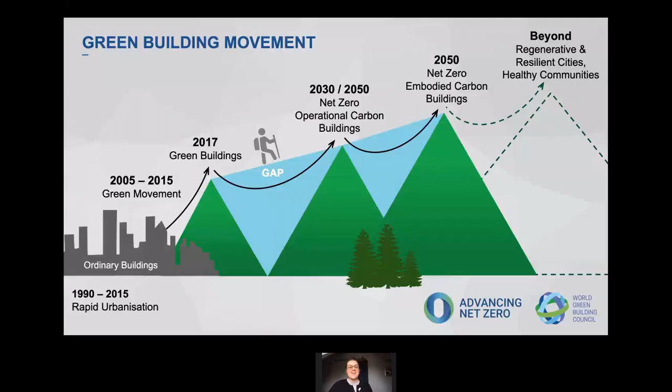That's why the Advancing Net Zero programme from the World Green Building Council exists. It's a global campaign to accelerate the uptake of net zero carbon buildings to 100% by 2050. We are increasing awareness and education of the urgency and achievability of net zero carbon buildings. We seek to achieve alignment and commonality across different Green Building Council approaches and certification schemes, and to expedite uptake in global markets by sharing market leadership examples at forums such as the one you're having here today.

As we've heard, and no doubt you're familiar with these numbers, our sector is responsible for around 38%, by recent numbers, of energy related emissions. 28% of that is from building operations, coming from both the residential and commercial sector, and direct and indirect emissions, meaning we have a challenge with buildings that already exist relying on gas or on-site combustion from diesel engines or oil, different fuel sources directly from the building, and also our reliance on indirect emissions through the grid.

We also have a responsibility for around 10 or 11% of emissions that come from embodied carbon, from the emissions that go into the production and construction processes through materials and the creation of projects themselves, but also over their lifetime, the maintenance of buildings and renovation and things like that.

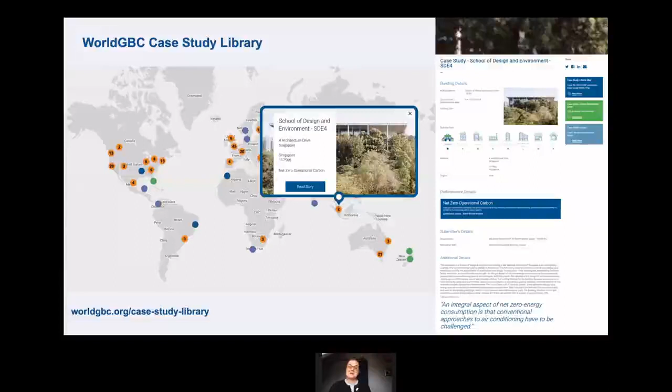But we need to be moving faster, and the Net Zero Carbon Buildings Commitment is an initiative from the World Green Building Council that currently has 132 signatories across businesses, cities, states and regions committed to going further and faster to achieve the targets set out in the vision statement across their own portfolios sooner. For cities, states and regions, this means actually implementing regulation to achieve our vision, because we need to be taking action at scale.

We've proven it's possible, and now it's time to ramp up those solutions. You can find lots more about this on our website.

So finally, our theory of change is that through radical collaboration across all disciplines throughout our sector, towards a common vision, both at an asset level and industry-wide: can you guarantee or justify why a project you're working on is choosing not to be net zero in this current climate emergency? Through enhanced communication, raising awareness, building industry capacity, and improving education by addressing foundational gaps in skills, data and benchmarks.

We also need to address our existing buildings, ensuring opportunities for retrofit are understood and capitalized on. This means creating new and innovative business models, new technologies and circular patterns that help drive us towards a net zero economy, and ultimately mandating reductions in both operational and embodied carbon aligned with a 1.5 degree compliant decarbonisation pathway via regulation.

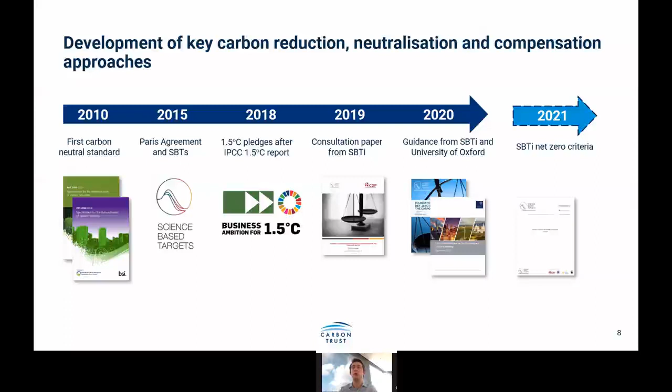One thing we've all seen across various news sources is that there have been many companies and countries increasing in their communication of carbon neutrality and net zero commitments over the last few years.

So we'll now take a deep dive into what carbon neutrality and a net zero roadmap looks like for business today. Five minutes, Tim. Okay, thank you, Julian.

Some background on how businesses have been developing their climate goals, but also a few definitions to put into place. Carbon neutrality is basically when the carbon footprint of an entity has been reduced and any outstanding emissions are offset with high quality offsets. So the key point is that carbon neutrality is something that is achievable today, but that is a more short-term ambition.

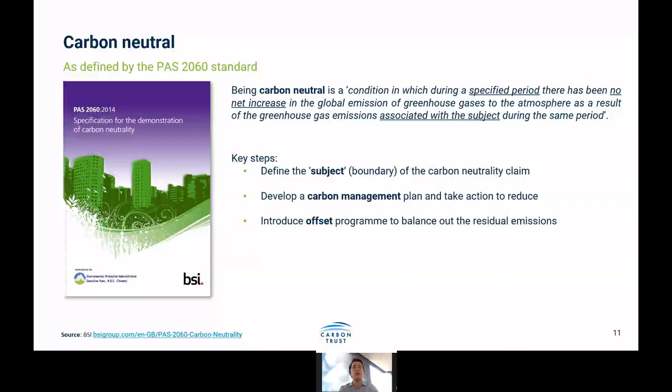If we move forward to the net zero topic, the science of net zero is quite simple. It basically means that every sector in every country needs to be on average zero emissions. And that's something we have a good understanding of across electricity, cars, buildings, and even a lot of heavy industry, as we're talking about on the conference here with the built environment. But in certain areas like air travel and agriculture, there is currently no prospect of getting to net zero in the near future without some radical changes in production or in our day-to-day lives.

So for these residual emissions, greenhouse gases will then need to be taken out of the atmosphere at the same rate as they're added, so that on average there are net zero emissions.

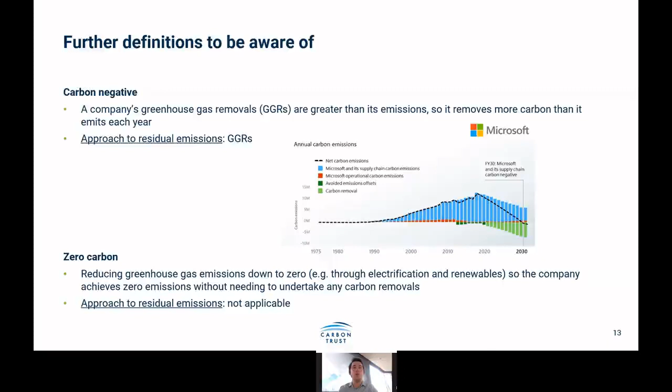A few further definitions to be aware of that have been mentioned as well. Carbon negative is basically when the greenhouse gas removals are greater than a company's emissions, so that it removes more carbon than it emits each year. One example is from Microsoft, who've set a pathway to being carbon negative by 2030. And then there's also zero carbon, which basically means that a company achieves zero emissions without needing to undertake any carbon removals. So just a quick overview of the difference.

So some of the reductions that are necessary in carbon neutrality are not actually specified, but for the net zero ambition, it's to be aligned to a 1.5 degree science-based trajectory. And I'll go forward onto some of the steps that can be taken as well.

So how can these definitions be translated into practical actions? Firstly, it would be to calculate a baseline footprint.

Basically, if a company wants to set a science-based target or be net zero, they would have to calculate a scope 1, 2, and 3 baseline. And to give a little bit of context about where this comes from, the scope 1, 2, and 3 emissions are as defined in the Greenhouse Gas Protocol.

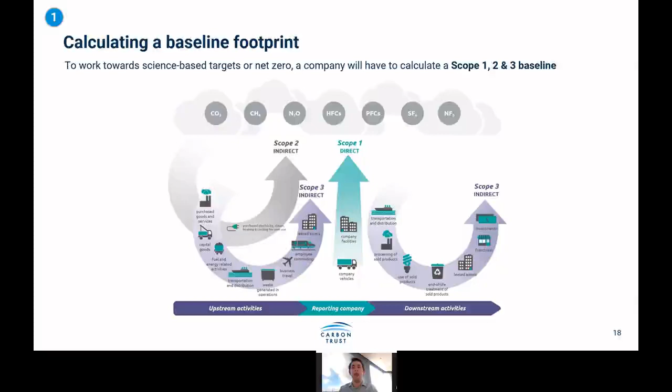So once this has been calculated, a company can then set a science-based target, and it would look at basically what's your current baseline, and then how you would have to decarbonize year on year in order to achieve a net zero goal by whichever year, depending on your sector and the size of company.

So just to touch on the different emissions and some of the different strategies that can be implemented. Across purchased electricity, looking at energy efficiency on site, and then moving to renewable energies. In transportation, moving to electric fleet, for instance. These are more easy, straightforward to manage and measure, but looking forward into the scope 3 emissions, that is a bit harder to decarbonize.

Looking into that, some of the top things that companies have a good awareness of is how much they're purchasing in their goods and services. So a solution could be to implement a better product design. We talked about circular economy models earlier as well. And then also with regards to business travel, that tends to be quite a large source of emissions for service-based companies.

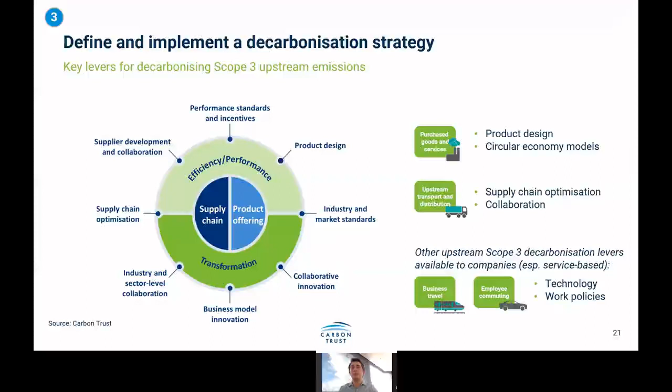Apologies. Yeah, so I'll just skip forward to the end.

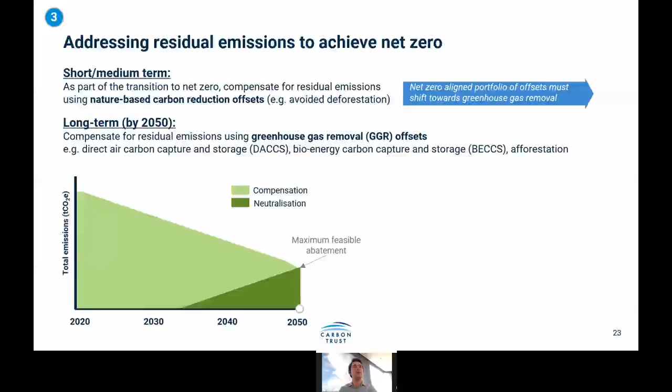So basically the journey to net zero: measure baseline footprint, align your science-based targets to a 1.5 degree pathway, then define and implement your decarbonization strategy, and then be clear and transparent with your communication—knowing what's included and what definition you're working towards—in order to avoid any form of greenwashing. That's all, apologies for going over time, and thank you for your attention.

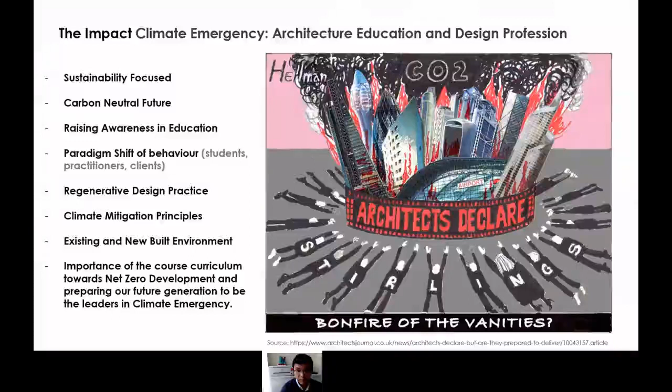Climate mitigation principles need to be adopted in existing and new built environments—we have to think about existing buildings and new buildings to make sure they are also carbon neutral. Most important is the role of course curriculum towards net zero development and preparing our future generation to be leaders in the climate emergency.

My observation or interpretation of rethinking the contents and role of academia is that it has to integrate environmental design within the curriculum. That should include more qualitative and quantitative aspects. Some technical modules should be included if there isn't any scientific, ecological, and multidisciplinary module integration—that's very important—and criteria should be designed such a way, for example RIBA criteria, to focus on net zero future as well.

This could be integrated at various levels—foundation course, undergraduate, and postgraduate—and I'm talking not only about the UK but across the world. For example, at undergraduate level, study should be more sustainability focused, with design studios and technical modules to support that. But at postgraduate level, probably more advanced technologies like life cycle analysis or zero plus energy buildings, etc., should be integrated.

Other content should be integrated with field evidence and reliability of digital simulation tools. You all probably know that RIBA design awards need integration of field evidence and field data, one year to be eligible for an award. So that's also important to include in the curriculum from the very beginning.

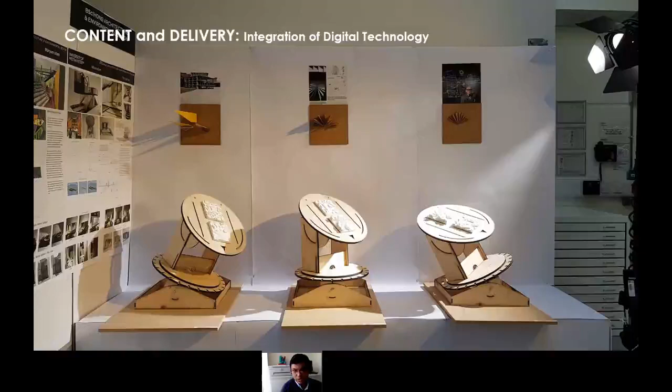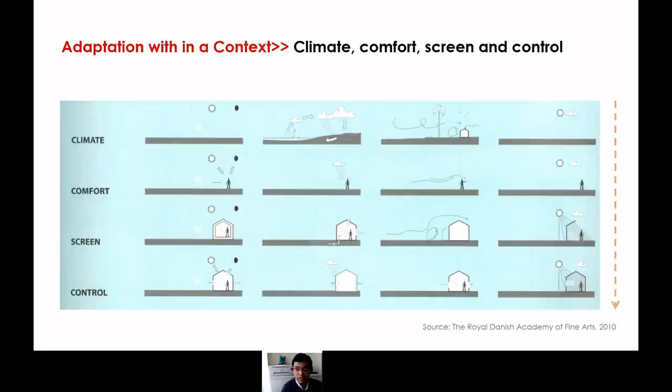It's also important to adapt to context, and we teach students how to cope with extreme climate scenarios in the future and how building skin should be developed differently in different climatic contexts - we should always do that. For example, one thing we do is learn from the past, learn about the clothing of a certain climate and how it has similarities with the building climate screen. Clothing insulation and building insulation are kind of similar in making people comfortable, and this awareness is usually developed through that.

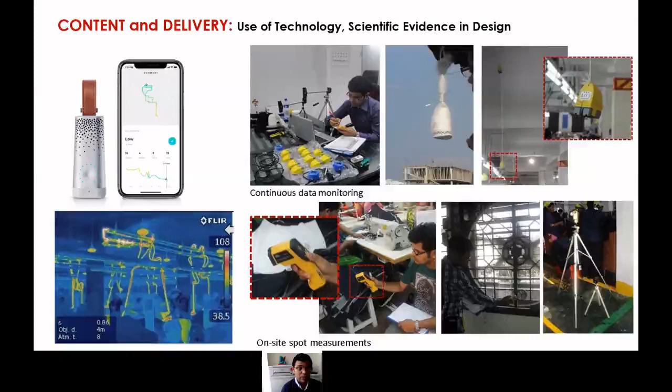But you also cannot always do physical modeling, so we have to build on reliable simulation tools that we can rely on - this is also part of the process. One example I want to show before I finish is a collaborative research and learning experience, where students were involved in research using IoT and real-time data visualization, so students understand how changing an opening window changes comfort levels and how real-time temperature experience affects the human body.

This kind of integrated approach to research and learning experience, students should have it so they are more aware of this from the very beginning. These are two examples I'm involved in at Sheffield Hallam University, in environmental technology modules where students get involved: first year they learn basic calculations, second year they understand modeling and simulation tools, and third year they apply simulation tools to a greater extent to achieve more environmental performance. Of course, Design Studio is also designed that way, to design off-grid systems.

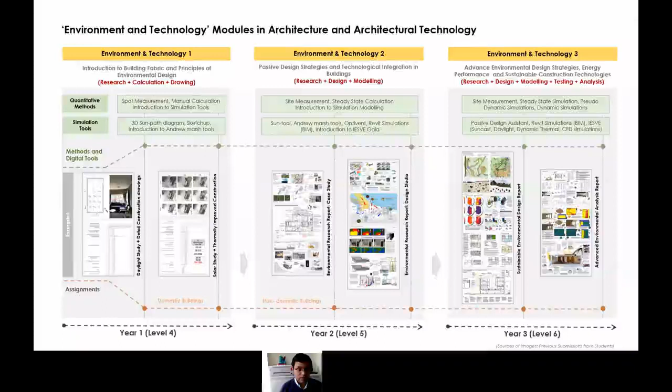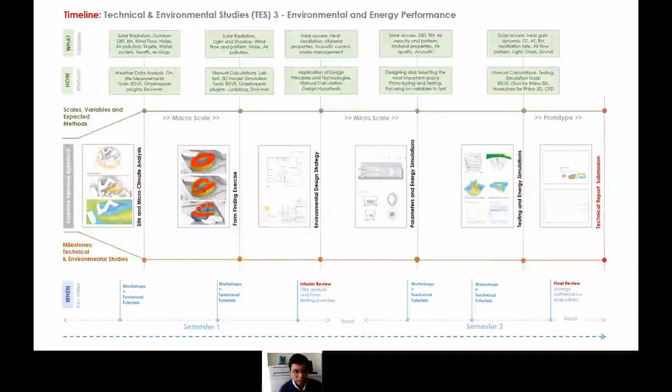Thank you, Motaz, for that perspective from academia and how academia is leading the fight towards net zero. Next up we have Dr. Andy Ford, also an academic, representing London South Bank University, where he's Professor of Building Systems Engineering. He'll be speaking on the work done so far by the UK, CIBSE, and other bodies on the climate emergency and net zero projects. I can see he's got his presentation ready.

Yeah, okay, I'll be with you in just a second. Hello. Okay, no, take your time. Not too much time. It's not too much time, thank you. Okay. Right, are we on yet? Okay, so... it's still on. Oh, there we go. There's full screen. Got there? Yeah, yeah. Is it a full show yet? I can't see it. Yeah.

All right, okay. Well, hello everybody, and thank you for inviting me to come and talk. I'm going to spend a little bit of time now talking about what's going on in the UK, and eventually from the university's perspective.

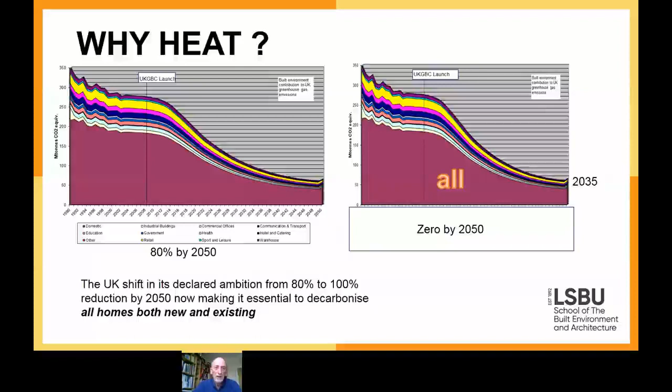But that big purple bit, that's our existing homes. There are 29 million homes in the UK, and 85% of those are heated by natural gas, and that's going to have to end really soon. That's a challenge for everybody in our entire industry.

Part of where we need our building services and knowledge about decarbonisation is into local authorities and governmental organisations, so that engineering knowledge is at the top all the way through, pushing for the right thing to happen. We've had many local authorities declare climate emergencies, and they're now desperately looking around because they're short of technical knowledge on how to do it.

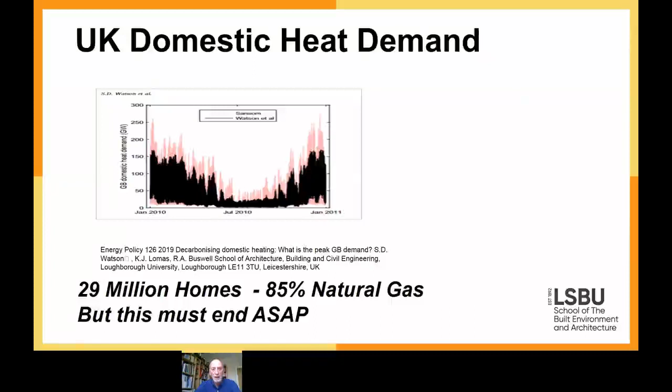Finally, what we're doing currently is debating and informing. We're running something called the Climate Emergency Debate Series. We've had several on heat, starting with one on decarbonising the domestic stock, and the next one is 'How on Earth', on Thursday the 22nd of April, Earth Day, where we'll talk about the Wellbeing of Future Generations Act—an amazing law which the Welsh government introduced that is affecting everybody's way of thinking in Wales. And that's it.

Thank you very much.

Thank you very much, Andy, and thanks for wrapping up so promptly. Great presentation. We're finished with the presentations for the morning session, as it were.

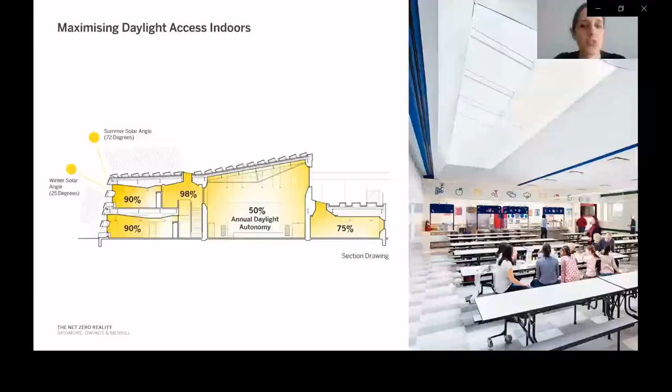Another key component of the school's design that renders this building so high-performing is one of its most visually distinctive features: a highly insulated exterior rain screen with 9-meter-tall precast concrete panels that anchor the facade at the top and bottom only, eliminating the need to puncture the air and vapor barrier along the building's height. With this approach, the building not only reduces its energy demand, but also minimizes maintenance requirements and maximizes indoor comfort throughout the year.

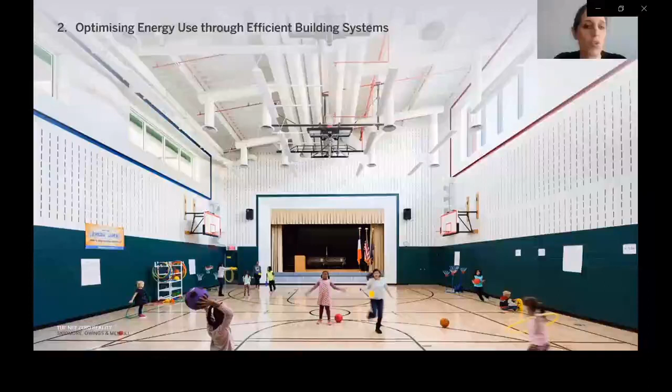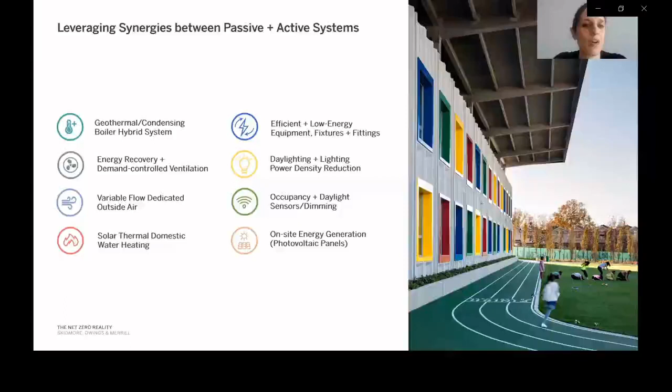In addition to maximizing passive design strategies, the Kathleen Grimm School also leverages active strategies and efficient building systems to optimize its performance while enhancing user comfort, health, and overall well-being. Some of the key active strategies deployed throughout the project include a hybrid geothermal system that helps naturally heat and cool the building, demand-controlled ventilation that saves energy without compromising indoor comfort, solar thermal that provides domestic hot water heating, very low energy equipment and lighting, and occupancy sensors that prevent energy wastage in unoccupied spaces.

All of these strategies enable the building to achieve more than 50% energy savings compared to typical public schools in New York City. This cutting-edge building's net zero ambition also defines its unique architectural identity. An energy-generating canopy of more than 2,000 photovoltaic panels wraps the building and harvests as much energy each year as the building consumes.

Working with the Center for Architecture, Science, and Ecology, a research laboratory formed in partnership between SOM and the Rensselaer Polytechnic Institute, the design team was able to maximize the building's energy generation potential on site by carefully placing the PV panels at different angles and in various configurations, which optimized their performance. As a result, the school's energy generation increased by 35%, leading to the development of its distinctive roof structure.

Throughout all of these strategies and more, the team was able to significantly reduce the school's overall energy use. Nonetheless, there was still an opportunity to go even further, especially knowing that almost half of the building's energy demand would very much be dictated by the way occupants use the space that the team was designing.

Influencing occupant behavior, therefore, was a critical part of the overall design and now operation of the Kathleen Grimm School at Sandy Ground. To ensure alignment to the project's net zero goal, and to secure consistency throughout the process, the design team partnered with the building's occupants on day one. In this rather unusual scenario, through a visionary yet pragmatic approach, the wider project team, including all key stakeholders, worked collectively to lay the groundwork for a net zero reality.

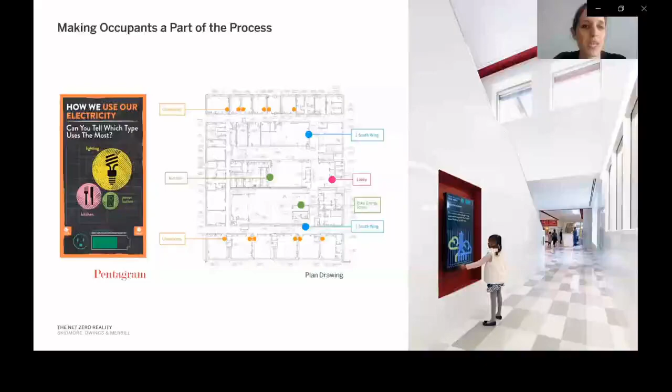This culture of shared accountability established at the design stage of the project continues to be at the forefront when it comes to the building's use, operation, and management. A continuous monitoring and optimization system, embedded with a 3-year commissioning period and consistent post-occupancy evaluations, guarantees the building's ongoing net zero performance.

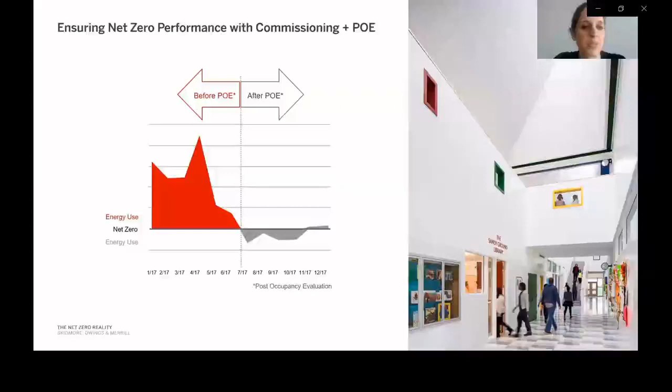A reputation for walking the walk, incorporating net zero performance criteria in the building's specifications and procurement process, as well as engaging the project team post-completion, have inspired confidence in the school authority that this building was establishing a new precedent for how future school buildings would be designed, built, and operated.

The Kathleen Grimm School points the way to the future, where research-based creative design, a collaborative approach from day one, and commitment to long-term responsibility offer an opportunity to seamlessly harmonize the physical, man-made, and natural environment of our planet, rendering us, as built environment professionals, the standard bearers in the fight for the future of our well-being.

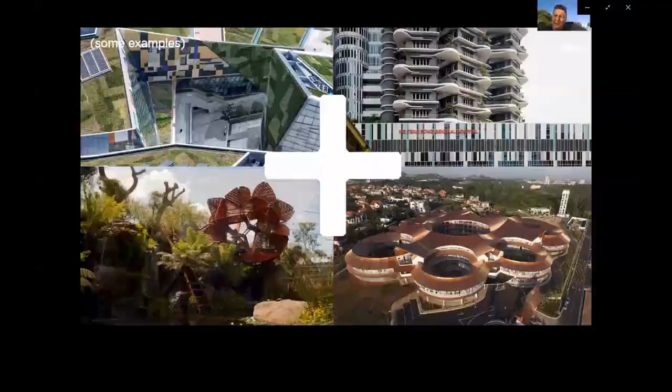Some examples of our work from around the world, China, Singapore, Malaysia, include hospitals, schools, community and cultural centres. There's great interest across all of these projects in the purpose and outcome of the work, the creation of place, the inspiration, the joy we find in the built environment, our workplaces, our homes, and also the lyrical and the imaginative. How do we inspire people to look at the world with fresh eyes?

From large breweries targeting net zero through to offices targeting Green Star and Platinum LEED, Platinum WELL projects, new sustainable communities, we're very interested in underpinning the built environment on an example of ecological sustainability.

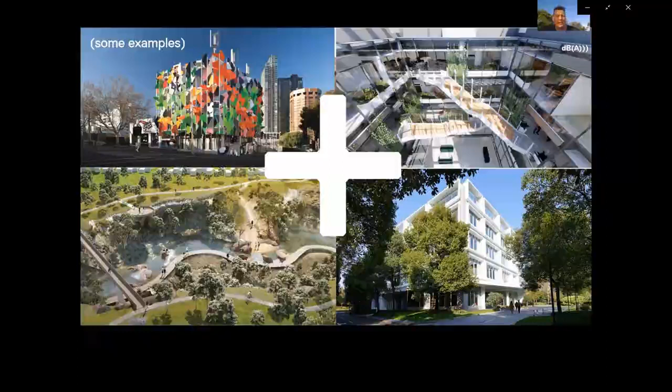The Pixel building is a project I'm about to talk about. I'm going to follow that into the Shanghai Construction Group SCG 0+, and finish off talking about a project quite dear to our heart, a future project. Sustainability for us.

Everything can be more or less sustainable, but for us, rating tools are to sustainability as religions are to spirituality. There's an underlying truth and medium to which these various tools, structures and scriptures give us some common ground, and that common ground is key to making any changes to the world.

Rating tools can be a fantastic lens to performance. Ultimately, each of these tools should be destined to make itself redundant, but they are a great way for us to find the commonalities between projects and understandings.

Zero tools coming in now, zero water, zero waste, zero carbon, zero energy, are starting to align with the passive house tools. In the Venn diagram of all this, how do LEED and BREEAM give us different filters to look at the performance of our projects? China 3-star and all the regional tools from Malaysia through the Middle East to London to Singapore, all of these underpin what we see as a great push towards the United Nations Sustainable Development Goals.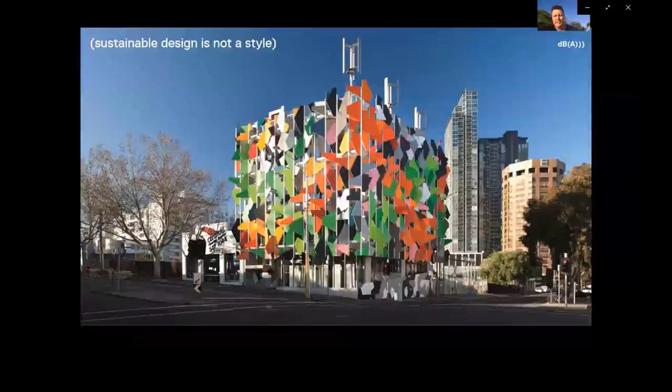And what we realized very quickly was that sustainability is not a style. If you design something to look sustainable, you've forever cast that performance into a stylistic argument, which we need to be very wary of. So our building is iconic, brave, quite bold in its colours and shapes.

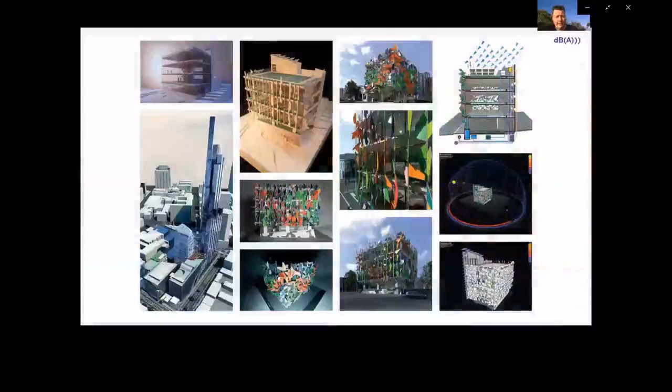It achieved a perfect score - every possible point in the Green Building Council Green Star rating tool. We got the highest score in BREEAM and LEED, well above the 75 points you need. We really demonstrated excellence across all aspects of the tool, from native grasses, xeriscape landscapes, to wind turbines - the lot. We had everything in here to demonstrate you could build a building in a transferable way, whether 60 storeys, 50 storeys, or 20 storeys. A lot of research, a lot of thinking, a lot of great minds took part in that project, and the sum of the parts is much more than all of these components.

To the credit of the project team, and actually living and working in the building now, some of these things don't work, and it's about understanding which things don't work and learning from that. When you're not finding something, not pushing that boundary, the line of testing to failure, then you really aren't learning anything. So we're able to take those lessons - being bold, being net zero, being brave - and ship them into new projects.

So in 2010, Pixel achieved 105 points from the US LEED rating system. It's the highest rated building in the world, yet certified anywhere - that's a lot of buildings. And sadly this remains the case 11 years later. So our team has been designing from this building to try and beat it, take it to the next level, and see what happens in 2022.

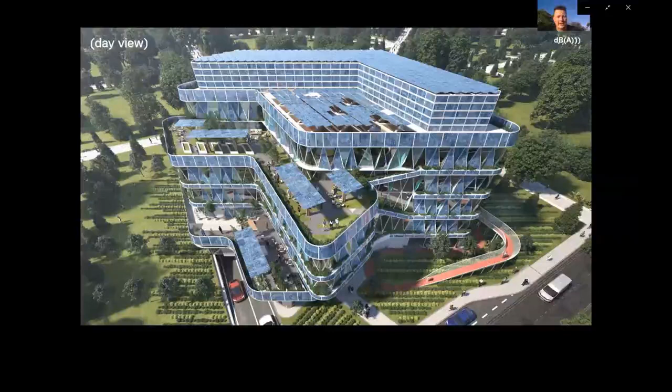Ultimately the project seeks to embody, achieve, and wrap a net around all of the 5 zeros, all of these rating tools, including Passive House, and produce a bit of a Rosetta Stone for rating tools - a thermometer on what we can do, what demonstration technologies we can embed, and how we can push architecture and buildings to change the rules by which we build buildings, all buildings in China from now on. That's how we get legacy changes in the projects we're doing.

So clearly for this particular project, the facade is our primary environmental organ, just like it is on our bodies. It's the interface, the membrane. It's where we harvest all of our energy. It's where we harvest our water. It's where we harvest our daylight from on the interior.

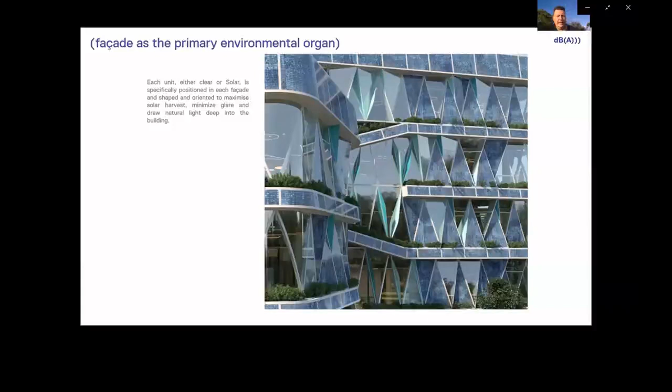We've developed some quite effective digital mock-ups that are now being tested and built in one-to-one scale in order to understand all of the components, minimizing glare and getting all of the systems right to define what the indoor dynamics are of the spaces.

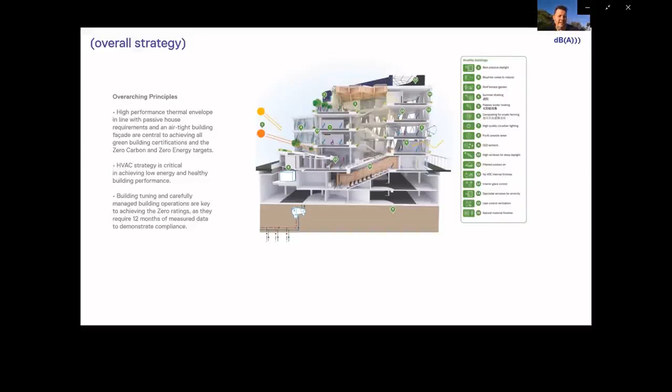This facade really envelops a Passive House project whose energy is all harvested from site. We're trying to get a very high efficiency, high performance building, reducing our energy use as much as possible, and tuning all of the tools to deliver the outcomes we're looking for, not only in net zero energy, but in net zero water.

Net zero water balance means that we're harvesting all of the water that we use inside the project on the site, including returning water through to the environment and the natural environment.

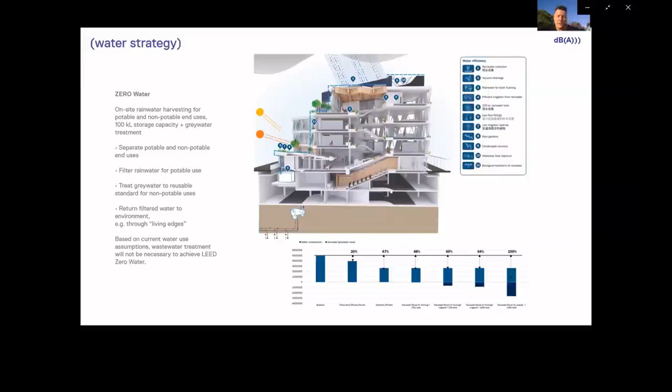Our energy strategy is really solar, solar, solar. We learned from Pixel that vertical turbines and micro turbines, whilst they have a visual demonstration, are extremely fickle given the low quality of the wind due to urban turbulence. We're only a 25, 30 metre high building, and turbines haven't delivered the outcomes we want, so we've really pushed a solar component here. We're looking at about a 62 kilowatt hours per metre squared energy budget for the office building.

So really, this building is like the olden day combine harvester, but it's a combined harvester where food, water, energy, light, everything we need is coming from this project.

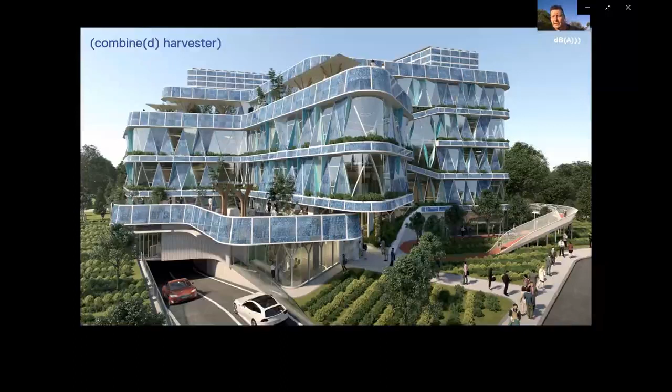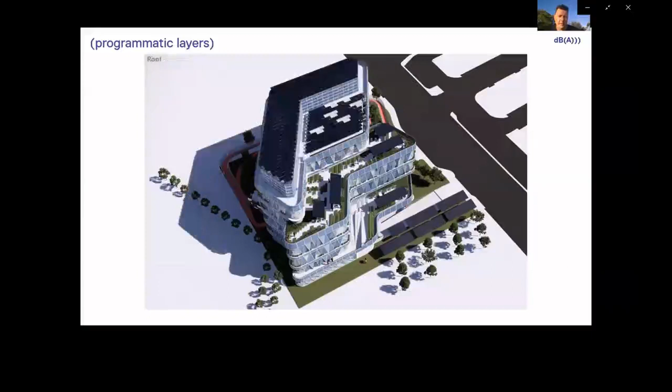You can see here the programmatic layers with ground floor: we've got a vegetarian kitchen producing lunches for all of the staff from food grown on site. Then a series of office levels, library levels and breakout levels for the building occupants on the way up, all the way to the roof with garden terraces and solar panel harvesting. The working heart of this project is this atrium space - it really is the main connector, the lungs and heart of the project.

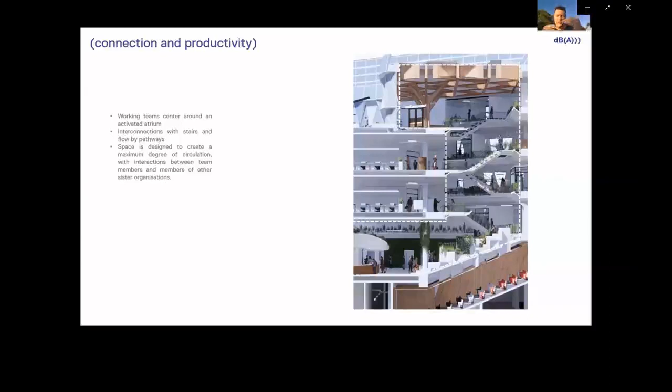Each office has 3 different tenants split over multi-levels, so we're driving people up and down stairs, getting them active, getting them circulating, and making them aware, in a work productivity sense, of what other people are doing in the space at the same time.

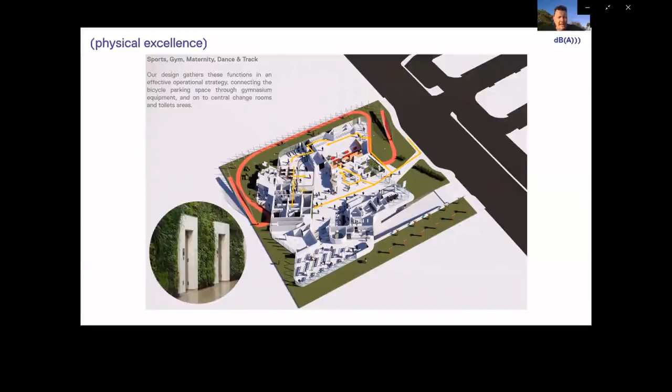As you can see, there's a radical biophilia layer run over the top of this - sports, physical excellence, lots of really interesting outcomes when you overlay all the tools together. We're talking running tracks, gymnasiums, dance halls, all sorts of productive environments we need to maintain to drive engagement into the physical reality of people. You can see the sports track running around the outside of the project here.

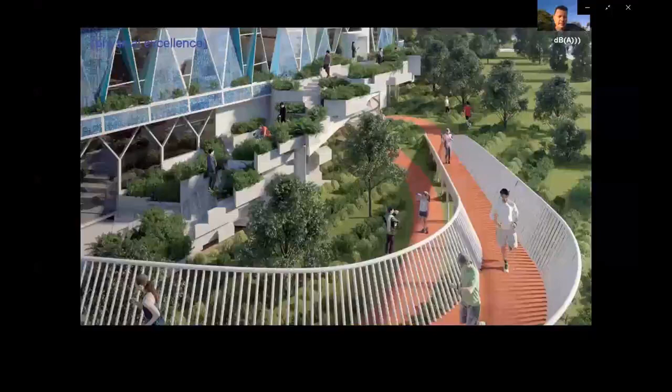I'm up to 13 minutes already, so clearly I need to get a bit of a kick on.

From biophilia and that biophilia integration, that project is our present cut at what we can do to be the most sustainable building in the world again.

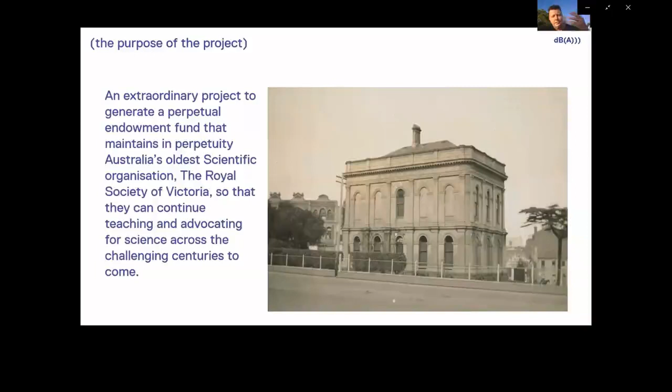If I've got just a bit of time to go to the future - 1 Victoria Street is a project for the Royal Society of Victoria to create a perpetual endowment fund to keep them teaching science to kids and politicians for centuries to come.

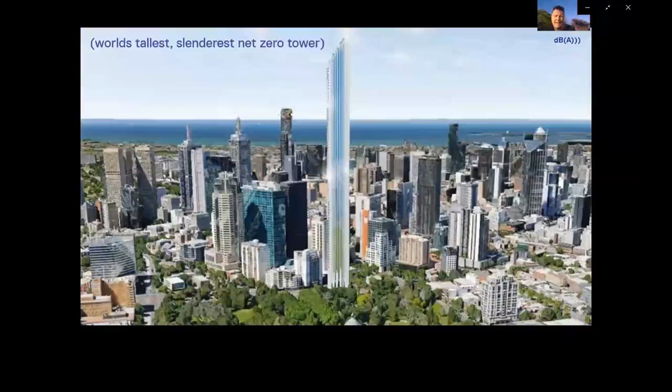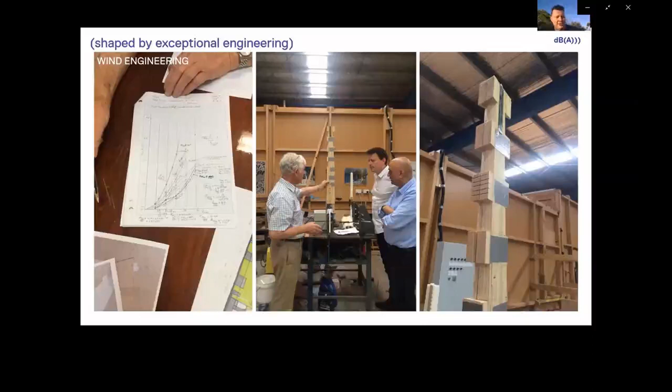We intend to create in this tower the tallest possible project we can make with all of these drivers in play. At 290 metres, it really is an icon for the city of Melbourne. It's net zero energy, net zero water, and it's driven by engineering - this is our wind engineering and structural team, Buro Happold and Mel Consult, testing and shaping and driving the sustainability.

It's driven by exceptional sustainability, set to become the world's tallest passive house - an innovative concrete tube with timber floors, net zero energy, net zero water, net zero waste, LEED Platinum, WELL Platinum, Green Star Platinum, and housing a UNESCO Global Centre for Excellence in the base of the tower.

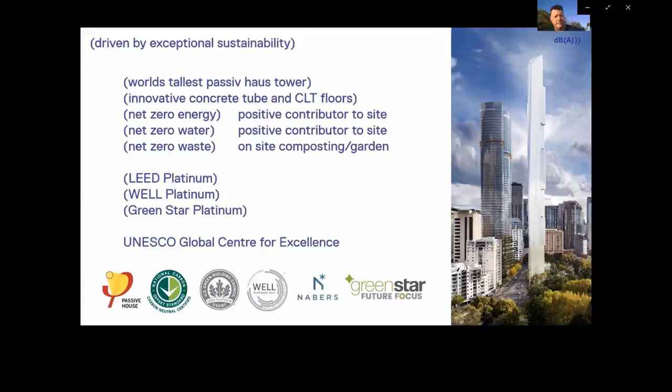The project for us is a translational tool where we're doing this project and open sourcing all of the technology and the deliverables that we put together, in order to make sure that this project can really transform lives, not only in Melbourne and Australia, but also around the world as a bit of an icon for the future and how we might possibly develop some of these projects.

So from past to present to future, what's really critical is that we understand that we're all living in a bubble. Everything we do, everything we are, everything we need is in this bubble, and it's where we all live. And we have to approach that world, this environment, this biosphere, ethically, ecologically, and exceptionally. That's what Decibel Architecture tries to do every day. Thank you.

Thank you, Mr. Dylan Brady, for an interesting insight on what's happening in Australia right now with interesting trends on the Pixel project. As rightly said, it's essentially creating a vision for sustainable architecture and for imaginative and innovative design. Amazing work in Australia.

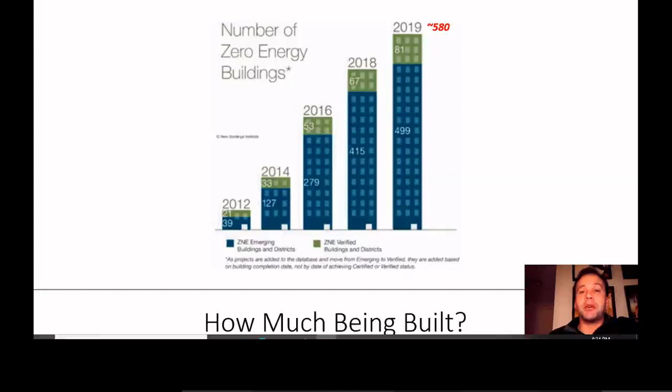We have already built almost 600 buildings as of 2019, and again this is a bit of a dated number. I'm encouraged to see that this is transcending political boundaries as well as climate zones. It seems to, in fact, be following our population density into our most populated and also most dense and growing areas, regardless of politics and climate, which is encouraging.

And we're starting to even see that the municipalities and states that did not exit the Paris Agreement are getting a leg up on the advantage. So we have codes and commitments as a big component of this.

One city, Boston, which is where my practice is located and I do a lot of my work in, is moving from a 17 to 18% renewable energy based utility grid to, by 2050, being 80 to 90% renewable based. This is also in conjunction with zero waste systems, zero transportation emission systems, and ultra efficient buildings, both new and existing. Dare I call it, it sounds a lot like the Green New Deal, right? This is what we in Boston and other similar cities are beginning to work towards, to electrify and decarbonize by 2050.

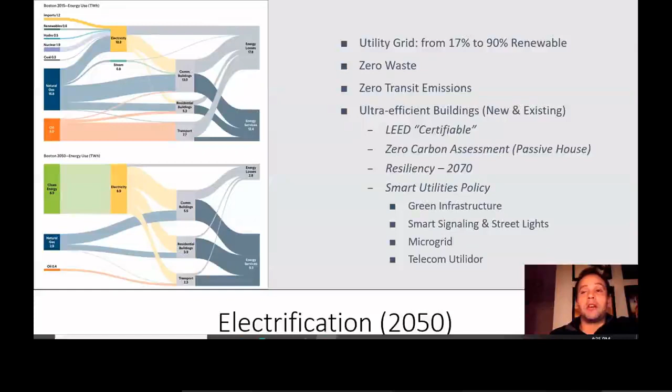We're starting to see falling costs, both for renewables as well as technologies, and this number continues to fall to the point where it is more cost effective now to focus on renewables than it is to utilities, even though utilities are giving us rebates.

So this is a look at rebates associated with passive house certification, upwards of $3,000 a unit in Massachusetts, as well as a pretty handsome net performance bonus, which if you go all electric could be pretty substantial in a heating-dominated climate like we have.

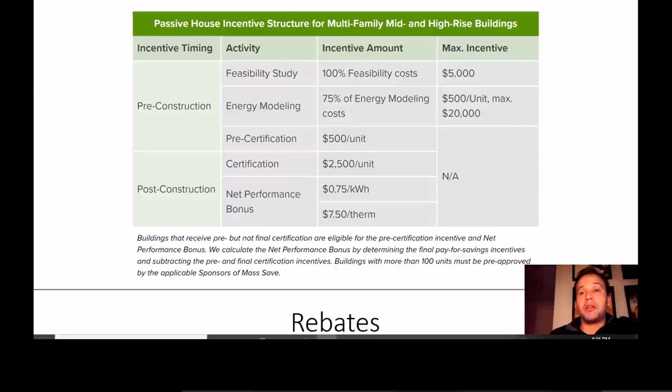We also are seeing third-party rating systems finally acknowledging the need to recognize buildings pursuing net zero. LEED, Passive House, and Living Building Challenge, and more are doing so.

We're seeing the technology becoming more approachable. Instead of the larger, clunkier, heavy dead load panels, we're starting to see more friendly technology for EVs, solar rooftops, and even solar driveways.

We are seeing AIA membership firms and others sharing lessons learned through meeting the AIA 2030 commitment, as well as winning the AIA COTE Top 10 award every year, and sharing that knowledge.

And for whom and why? Well, the future generation demands it. If they are to be successful, if they are to thrive, if they are to benefit from the world that we inherited from those thinking about us when we were the future generations, well, they're not just sitting back and waiting for us. They're actually demanding it. You can ask Greta about that. But they deserve it too.

So I want to talk a little bit about mission to market, mission to mass market. How do we move from mission-driven clients to mass market clients?

The Evolv1 project in Waterloo, Ontario is such a project. This is Canada's first zero carbon building. It's developer driven, and so needs to be highly flexible. It's on suburban previously developed land, and it came in at a typical market rate Class A budget. They did not want to price out the tenants they wanted to attract. It's 104,000 square feet on 3 floors, open office spaces that could be various different sizes, or you could have one tenant that comes in and takes up the whole building.

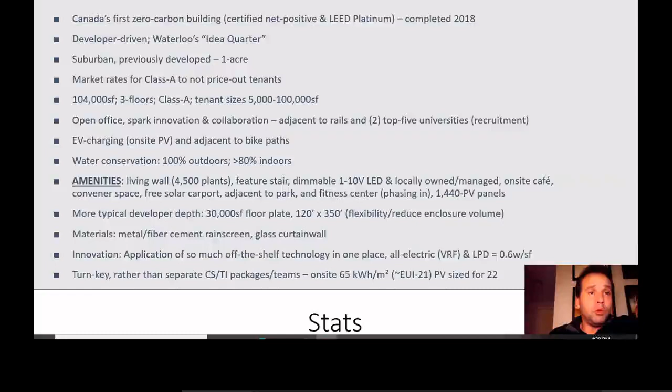They have on-site PV, rigorous water conservation strategies in pursuit of its LEED Platinum certification, which it recently won, and a series of amenities. What I like about this building is it accommodates a deep, flexible floor plan, so it doesn't have to be designed around the alphabet shapes that we have been trained to do in passive design for years. It utilizes off-the-shelf materials and off-the-shelf technology to push the envelope to this point at this price point.

One of the innovations here is both its application of off-the-shelf technology as well as turnkey space rather than separate tenant improvement packages. That allowed the landlord to control the energy use, the plug loads, etc., the water use as well. And what we did was we oversized the PV based on the site that we had with the load reductions that we made early on in order to achieve the carbon positive strategy.

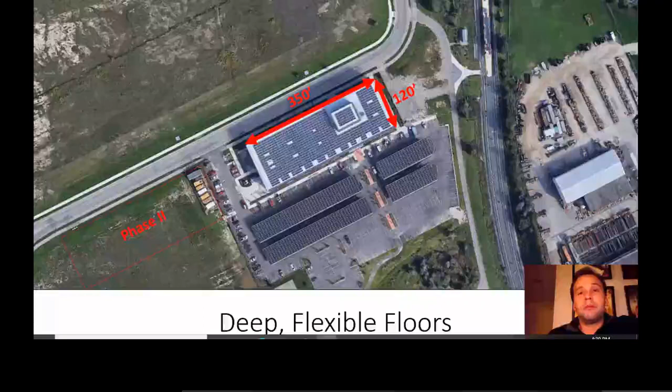We could have actually put more PV here, and this building is designed to be phased. They're actually building phase 2 right now. And again, this is a deep floor plate building. I like that about it because it shows that you can have flexibility and passive strategies and high performance too. You don't have to throw out one with the other, which is sort of typical sense, right?

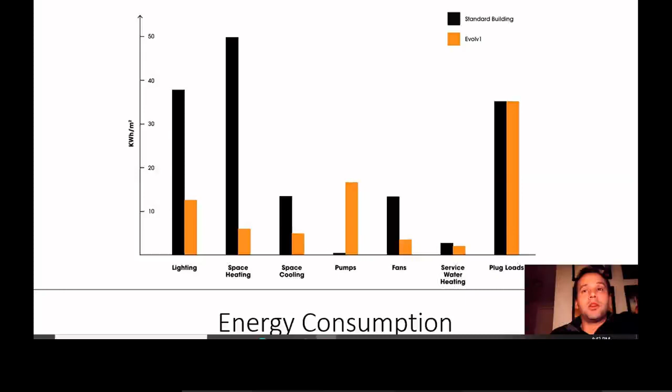Just talking about energy use, when you get to this level of efficiency, you'll start to note that the plug loads become something you need to manage because they're the highest load in the building, as opposed to a standard building where it's heating and cooling systems followed by lighting.

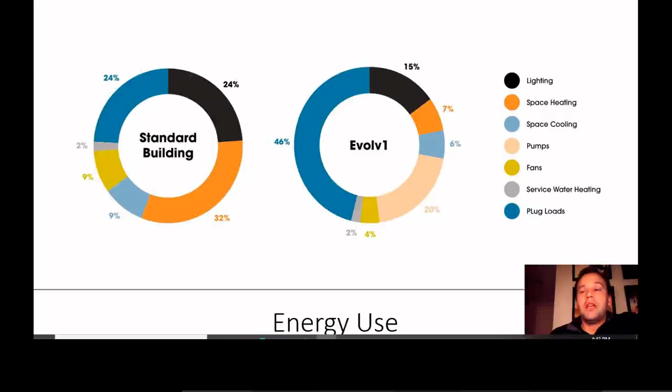We utilized a parametric design process to consider all the design options and budgetary constraints, working backwards from the bundles of strategies that worked to meet our goals and budgets. I think parametric design is amazing because it doesn't alleviate the need to be creative, but it makes sure we're working with the factors in mind and can balance the complexity of projects.

It won't tell you how tall to make your building. It won't tell you how wide to make your building. It can, if you want it to, but there are elements it cannot replicate that you still need humans for. So we arrived at three options, finalizing ourselves on the third option.

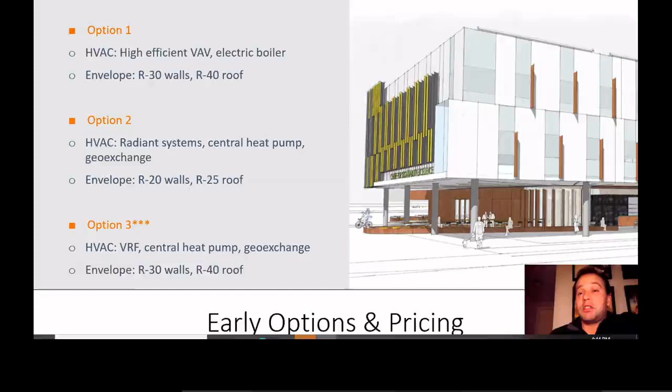Even though we needed a more extensive and expensive thermal envelope, what we liked about the HVAC system with the VRF central heat pump geo exchange was that it gave us the flexibility we wanted and the ability to electrify. So we were again working backwards from the goals and budget on the solutions and bundles that got us to where we went.

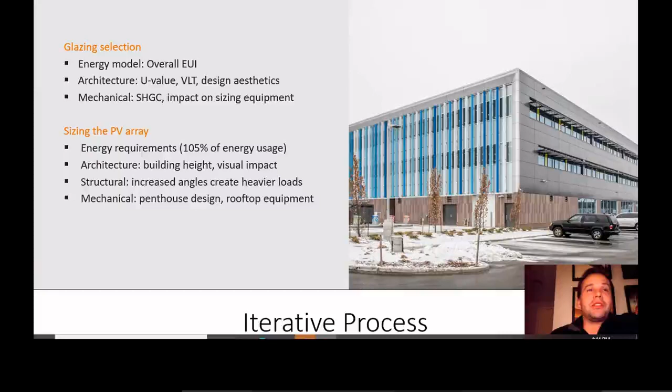We still had to do some manual things like glazing selection, architectural design, color selections, and sizing the PV array. There are a lot of HVAC systems, innovations, and off-the-shelf technologies incorporated into this building. Even though we were using parametric analysis to work backwards from the goals, we still had to undergo value engineering through the process.

So again, it takes trained individuals, and the computers won't do it for you, but they're an aid to help manage the complexity. So we didn't get our solar labyrinth, we didn't use displacement ventilation on the ground floor, and we didn't get a living machine. But we got most of what we wanted.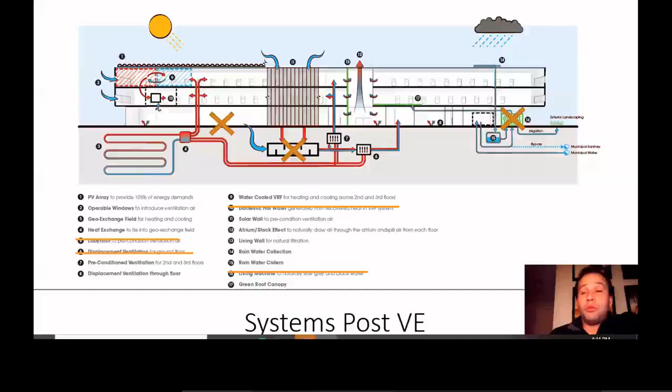So our conclusions are: space use and occupancy are critical. Maximize passive design first. Keep the building simple. Parametrics can handle complexity, but they won't replace the human, at least not yet. We need to electrify before 2050. We've got to control our plug loads through smart technologies and sensors. Form is flexible now, as long as it's passive, mission-driven, or developer-driven.

Submetering and commissioning are critical. Maintaining PV cleanliness for optimization is important. Better envelopes equal simpler and eliminated MEP systems. Staying focused on holistic solutions is also important, so we can't just throw out everything for efficiency. We also have to think about health, resilience, durability, beauty, and inspiration.

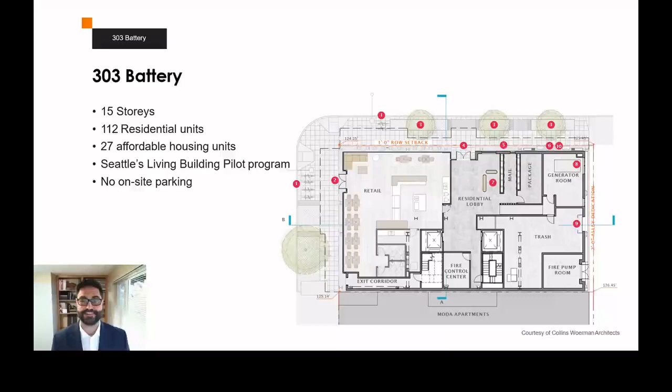303 Battery Project is basically an evolution from the 47+7 Apartments project that we designed with Collins Woerman Architecture a few years ago, located in the UW district here in Seattle. It incorporates modular construction by SLI, Sustainable Living Innovations, who own a factory where all the modules are basically manufactured in the south of Seattle, in Tacoma, Washington State.

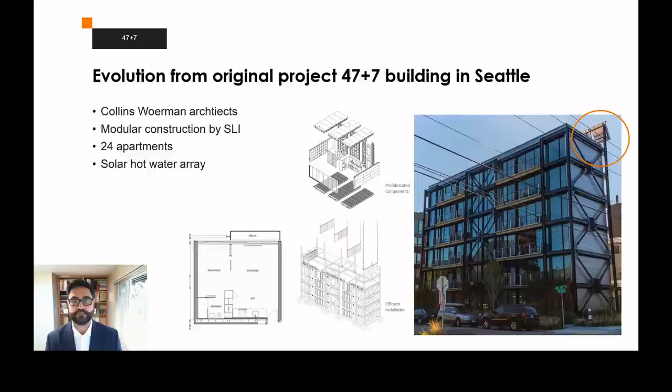47+7 incorporated a solar thermal array on the south facade, as you can see here on the top of the slide. The apartments incorporated an in-floor radiant heating solution, but no provisions for comfort cooling. So the client requested us to incorporate comfort cooling provisions, or a fan coil, in the units in order to be able to transfer this design to other climate zones in the US.

However, there were some restrictions imposed on us. One is that we have to live within the wall panel, which currently we are using to distribute ductwork for ventilation. As you can see in this diagram, it has to have at least half a ton, or 1.8 kilowatt, capacity, and it has to be quiet operation since it's a residential use.

We worked with Williams to develop this low pressure, low noise fan coil unit. You can see here on the picture how we ended up with the cover that the interior designer chose to use. But the most important thing was that the two-pipe coil was low pressure, and therefore we could make it work for the half a ton with 4 CPU-like exhaust fans, so they can move air in a very quiet operation.

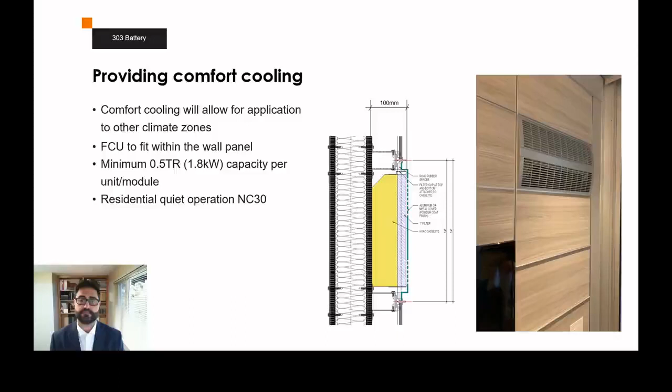The city of Seattle has this incentive program for developers to create high performance projects, and one is the Living Building pilot. The idea here is that if you are able to achieve the performance, they allow you to build up to 30% more floor area and give you additional height for your FAR, up to 7.7 meters, which allowed us to get 3 floors in addition to the original 12. That's why we have 15 stories. That is a big incentive for developers to go beyond the traditional design for residential buildings.

The carrot was additional FAR, but the stick is basically that the project needs to achieve full Living Building Challenge certification, or at least Energy Petal certification. In addition to that, you have to not use potable water for non-potable water uses, whether it's irrigation or flushing toilets.

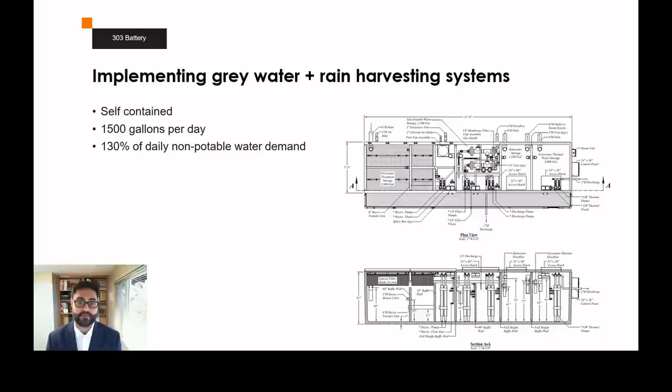So in order to comply with the program, we need to integrate a greywater system treatment plant. We did this with a skid-mounted, self-contained system with 1,500 gallons per day of potential treatment. Because Seattle is in the Pacific Northwest and we have a large amount of rainfall during the year, this system will actually be able to provide more than 130% of the annual daily demands of the project.

The other requirement for the pilot program was to achieve a 25% reduction from the target performance path code compliance. Being a residential project, we have to be lower than 35 kBTU per square foot, or equivalent to 110 kWh per square meter. The typical split for this target performance path is 30% consumed by domestic hot water, 27% by space heating, 11% by fans, and 8% by interior lighting.

So the team wanted to focus on those specific areas to make this reduction. Based on the modular nature and the original design for these modules, we decided to leave out the interior lighting and focus on these particular three areas where we could achieve that 25% savings request by the city.

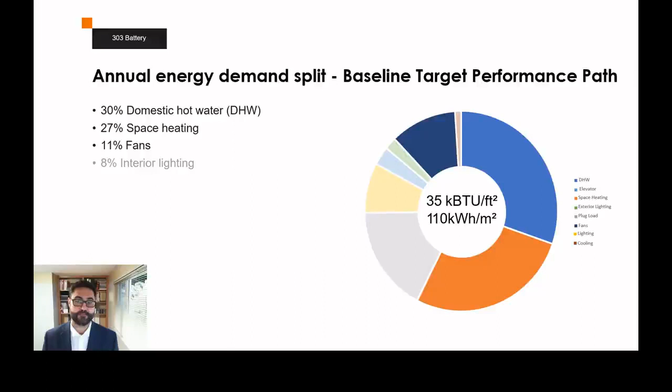Lean Mean Green is the methodology that Stantec uses for performance-based projects, and is a way of achieving this reduction of energy and increased performance. Because this project was modular and we already optimized the ceilings, floors, and walls, and even the specification of the glass, there was not a lot for us to do within the lean portion of the project.

And we focused a lot on the mean, basically how we're going to be treating that load that we already reduced through the lean process earlier on, and making the heating mechanical systems very efficient. So that's what I'm going to explain now.

One of the restrictions of the Living Building Challenge is that the building cannot burn any fossil fuels for domestic hot water or for space heating. With the implementation of the greywater system, we decided to go almost straight away to a wastewater heat recovery heat pump. These heat pumps are very efficient with a COP of 8.5, but they have a limitation on how hot they can produce the water.

It's about 49 degrees C, and if you just link it to the greywater system, it can only really produce about 80% of the daily demand.

Therefore, we had to supplement that wastewater heat recovery heat pump with an air source heat pump to top up the temperature from 49 degrees C to 60 degrees for Legionella control, but also to have enough capacity that the greywater system cannot produce. So we have now about 150 to 160% of overall capacity within the building on these heat recovery heat pumps.

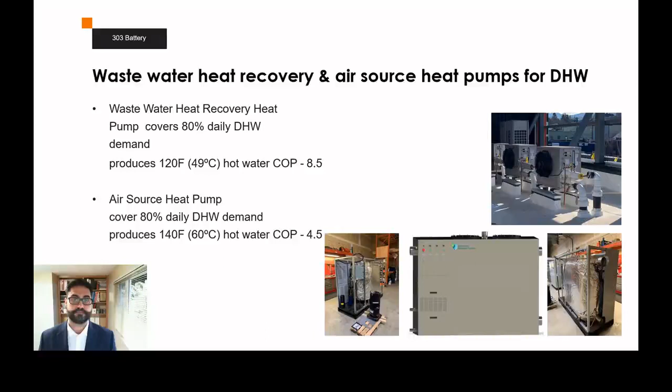These heat pumps were connected to the integrated piping system, where the domestic cold water supply is used to serve the fan coil units that we discussed. We are doing this because the temperature profile of the incoming water from the utility is more or less constant over the year at 9 degrees centigrade.

This has enough cooling capacity for us to apply some comfort cooling, since the Pacific Northwest doesn't have a very hot or humid climate. I understand this is not true in the UAE, where the supply temperature of DEWA, even in winter, is going to be somewhere around the 20-something centigrade, and therefore there's no real capacity for you.

But here, having the opportunity to gain and extract some cool out of the domestic cold water allows us to provide that perceived luxury aspect of having cooling without having to spend a lot of energy in the production of cooling demands or use a heat pump or a chiller.

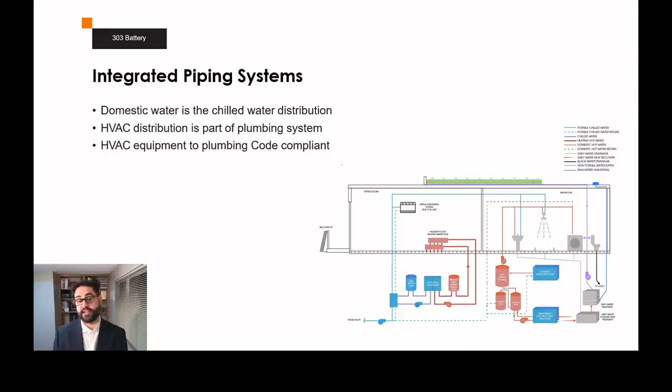At the end, the water cycle for 303 Battery is not a traditional linear intake-discharge process, but makes the potable and domestic water an intrinsic part of the overall project energy efficiency. We use it for carrying cool and heating, and then once we insert the heat, we recover it before we treat it for the greywater system and use that water for flushing before it gets discharged as black water into the sewage.

After we have squeezed as much efficiency as possible out of the mechanical systems, we can focus now on energy harvesting and renewables, which is the green part of the design methodology I'm explaining: lean, mean, green.

Initially, as per the project 477, it was thought to have a solar thermal collector array within the project, but the heat pumps are so efficient and the power production is more flexible that the team decided to use a PV array instead. The on-site array provides around 45% of the annual energy demand on site.

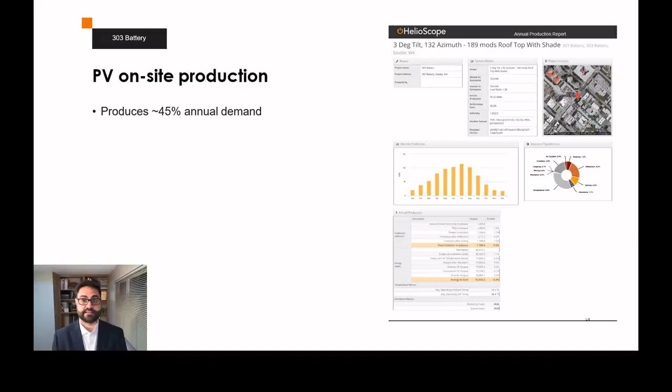This array is located in 3 major locations: the rooftop area, the eastern facade in vertical position, and also the western orientated units integrated within the balconies. We have about 260 panels for a total peak capacity production of electricity of 100 kilowatts.

Unfortunately, this site is located in an area where the Seattle City Light grid cannot accept exporting of power, and therefore we cannot use the grid, which is very typical in other net zero projects, as a virtual battery. In order to harvest as much as possible power during the summertime, which exceeds the demand on the site, we have an array of batteries in the basement.

On-site array, PV array for 303 Battery was not enough to produce the 100% energy demands. And to comply with the energy petal for the International Living Future Institute, we needed to invest and create a dedicated PV farm somewhere else.

The owner decided to invest in the rooftop of the Sustainable Living Innovations factory, which is creating the modules for construction of this project. And therefore, they created a PV farm of about 0.5 megawatt peak production with somewhere about 1,400 panels. These panels, and this array, are in a good location where the grid actually can accept the electrons. So we have just a direct connection to the utility, and we are exporting every single kilowatt hour we're producing.

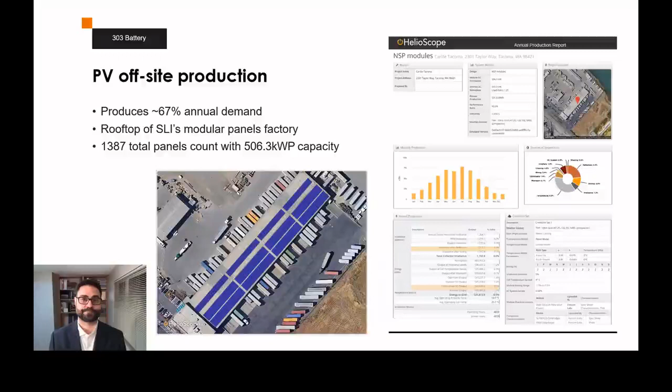To understand all the performance of these design features that we have integrated within the project, and also to be able to compare with the target performance path by the Seattle Energy Code requirements, we modeled this project in IES virtual environment. We incorporated all the passive systems like natural ventilation, the automatic roller shades, occupancy sensors, and also daylighting controls for the interior lighting that are already part of the project.

Now that provides us an EUI that we can compare with the target that the city imposed on us, which was a 25% reduction from that 35 kBTUs per square foot, or 110 kWh per square meter.

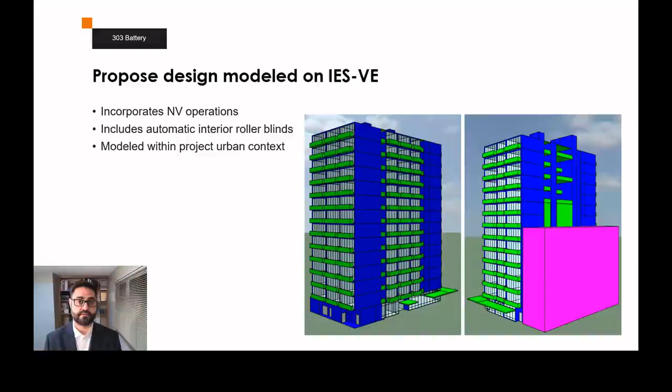The Seattle Energy Code allows us to use only the on-site production of renewables to comply with the target performance path. That is a difference with the International Living Future Institute for the energy petal, but that's what we agreed to use.

The estimated performance of the project is 26 kBTU per square foot, or 81.4 kilowatt hour per square meter, which is in compliance with the Seattle Energy Code 2015 target performance path and the Living Building pilot program.

To wrap up this presentation, I just would like to say that there is not one technology you can apply and it will get you to the net zero energy performance, but it's more like a method of designing and integrating different energy conservation measures that will help you get there. You need an architect to go with you, and also a committed developer or owner.

In this particular project, we have an enhanced performance facade, also active systems for controls like natural ventilation or daylighting, occupancy, and also an app that we have developed to let the occupants know whether it's a good time to open the window or put the laundry in, in order to consume energy that's been harvested at that peak time instead of trying to put it into the battery system.

Now we have in-floor radiant heating, we have the wastewater heat recovery systems, and very efficient overall mechanical systems that help. And to wrap it up, we also have the PV array on site.

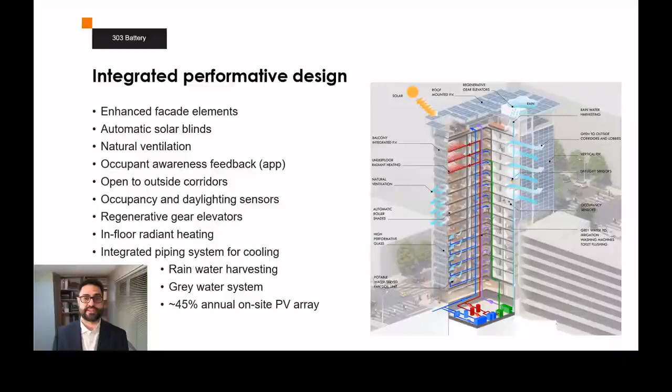But I think the most important thing is that we have learned some of these technologies, how to apply them so we can move forward to the next project. And that's what we are doing. Right now, Collins Woerman, SLI, and us, Stantec, we are looking at applying these lessons learned to another project very similar to 303 Battery in California.

And that is basically the whole intent: to create and transform the market through good design and examples that are replicable and transferable from one market to another.